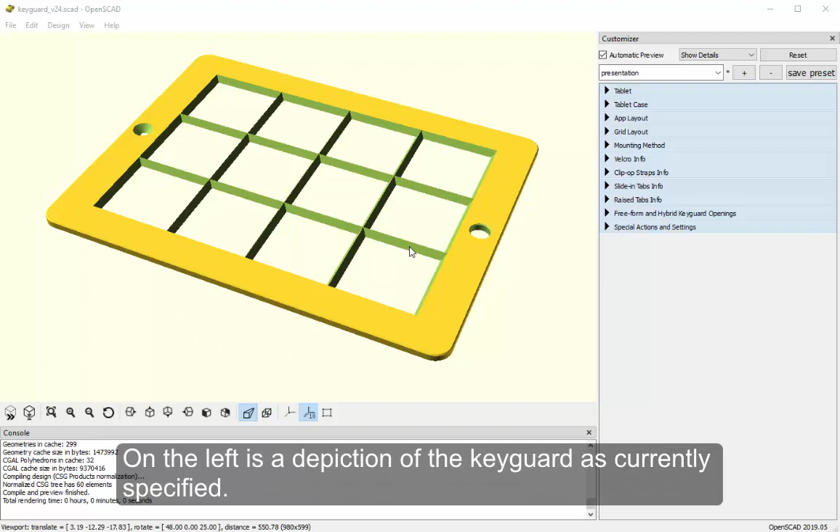When I launch the two, I see a screen like this. On the left is a depiction of the keyguard as currently specified. On the right are a set of expandable sections with options for customizing the design. I'm going to design a keyguard similar to the one that I purchased from Keyguard AT.

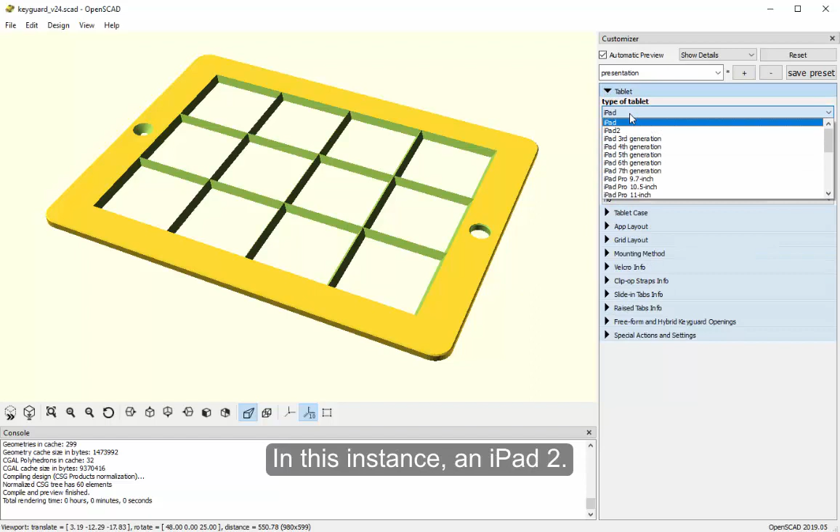First, I'm going to specify the tablet, in this instance an iPad 2. I can choose to expose or hide the camera and home button, but I'm going to leave them exposed. I can also swap the location of the two, and that might be necessary depending on the tablet's case. A detailed explanation of all the options and their implications for the design can be found at the Volksswitch website.

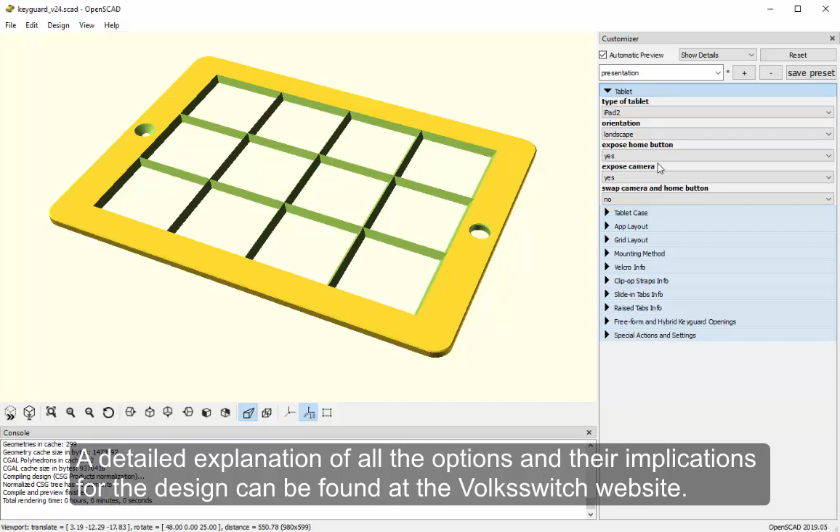Next, I'll specify the layout of the TouchChat app. I'll specify the heights of various components of the app. I can take the measurements using a metric ruler or by counting pixels in a screenshot. According to my measurements, the status bar and the upper message bar are a combined 11 millimeters in height.

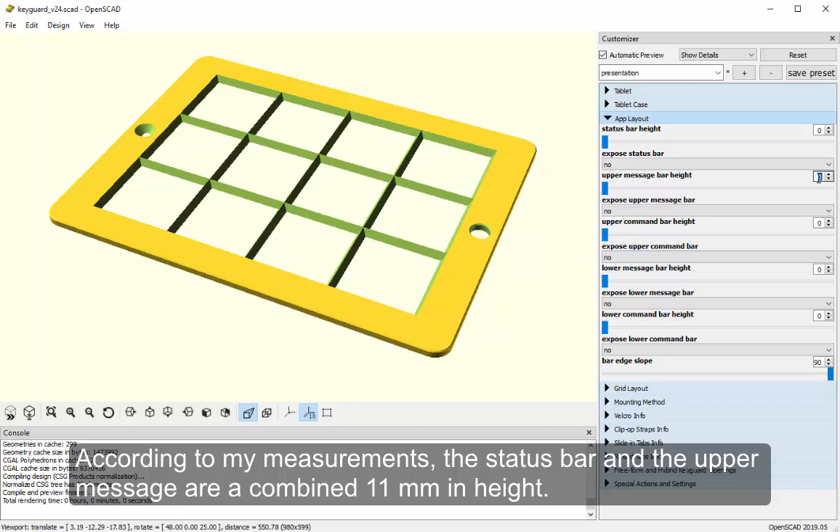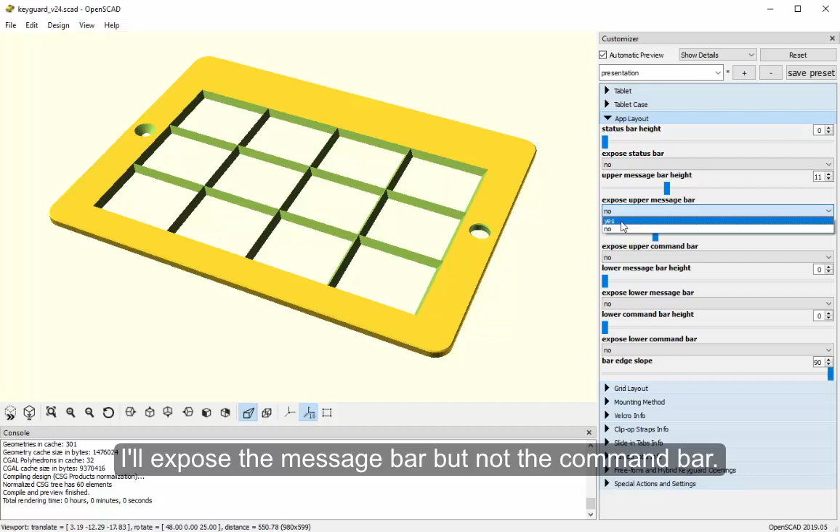Note that the picture on the left updates with each change so I can immediately see if I've made a mistake. The upper command bar is 9 millimeters in height. I'll expose the message bar, but not the command bar. There is no lower message bar or command bar in the TouchChat app, so I'll leave these unchanged.

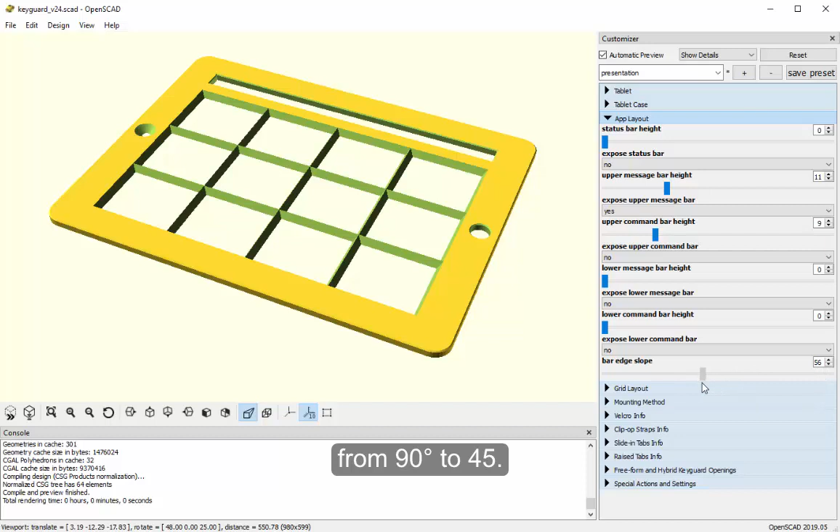I can provide easier manual and visual access to the message bar by changing the bar slope from 90 degrees to 45. This is only possible because we will be 3D printing the keyguard. This is not possible for a laser cut acrylic keyguard where every cut is at 90 degrees.

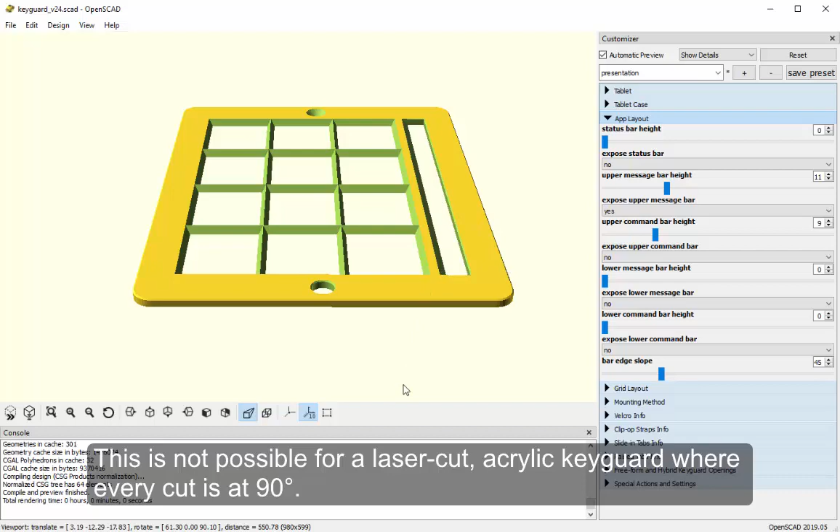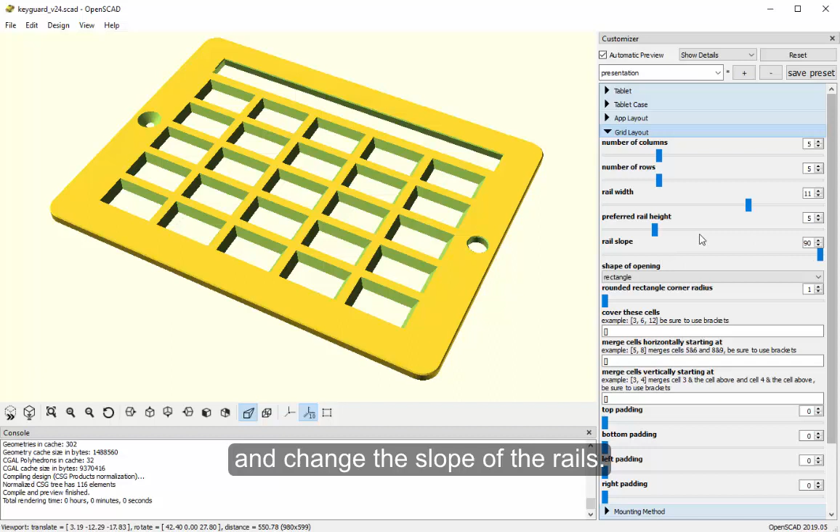Now we'll lay out the grid area. The app will have 5 columns and 5 rows. I could widen the rails between the buttons and change the slope of the rails. Again, laser cut keyguards can only have 90-degree cuts.

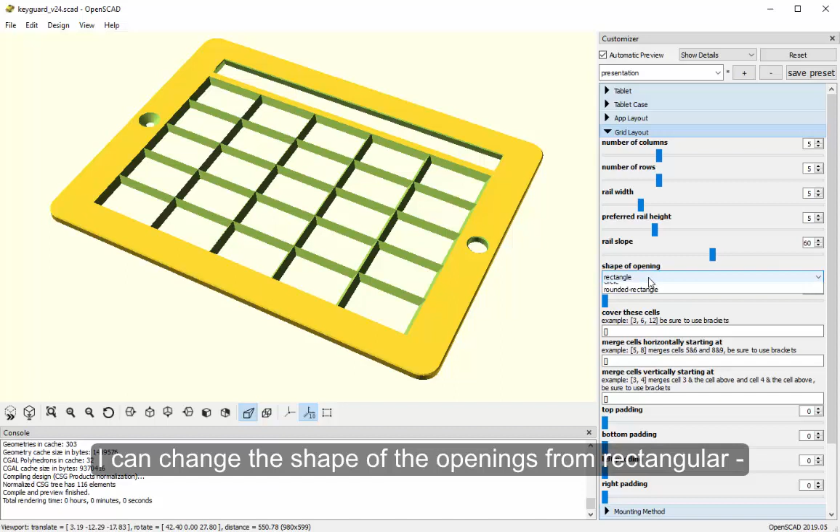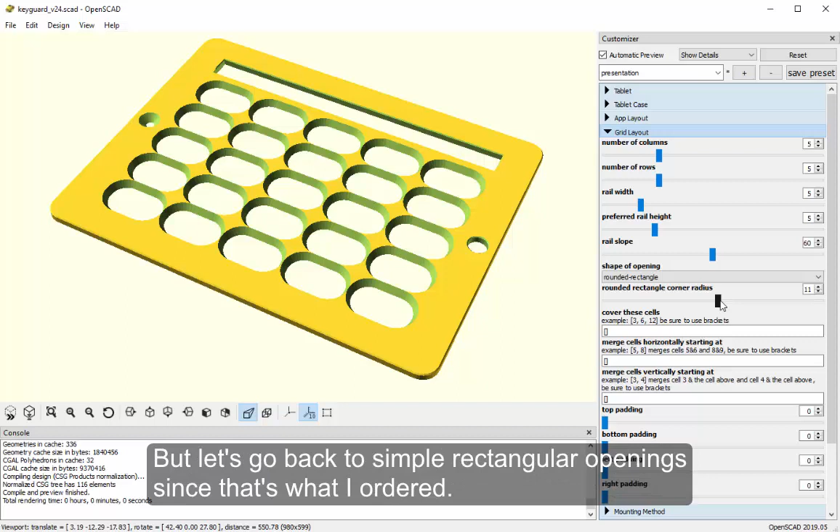I have the option to cover certain cells in the grid or merge them both horizontally and vertically. I can make fine adjustments to the location of the rails by adding padding, but that's not necessary with the TouchChat app.

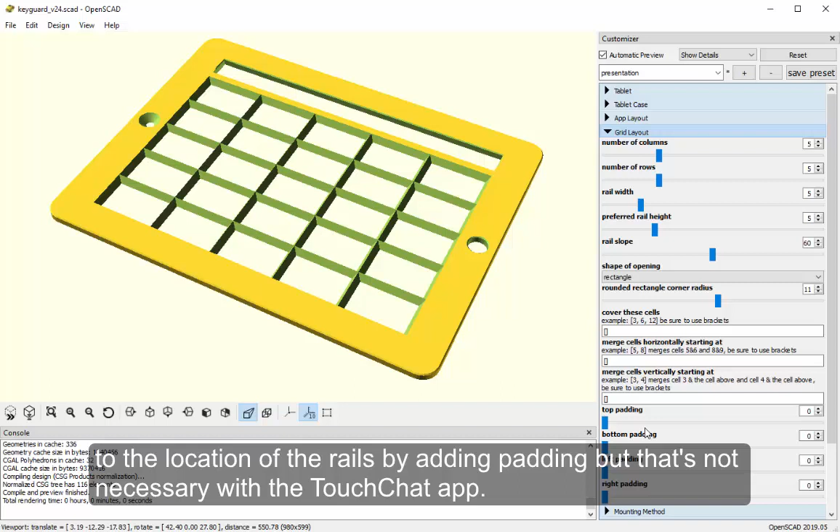We're almost done. The last thing we need to do is settle on the mounting method for the keyguard. If I'm not using a case, I have the option to use suction cups, in which case cuts are made to accommodate the top of each suction cup.

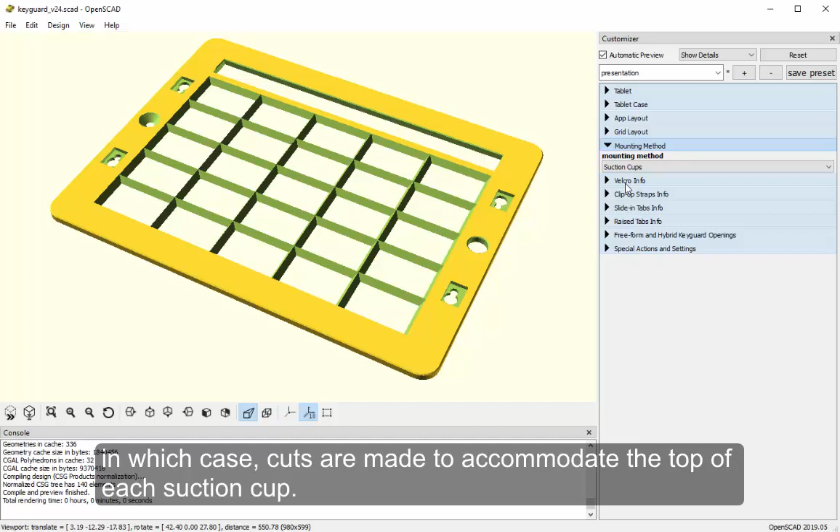I can go with Velcro, in which case recesses are added to the underside of the keyguard. I can go with screw-on straps that I purchased from Keyguard AT, in which case cuts are made to accommodate those straps.

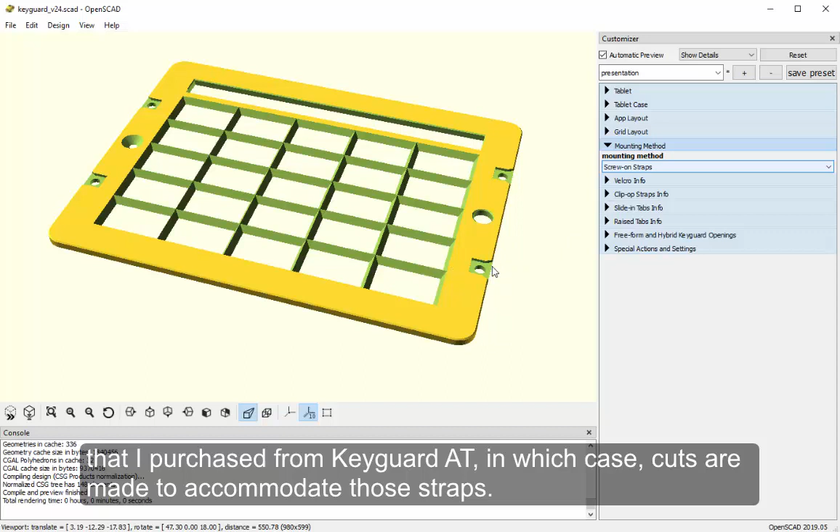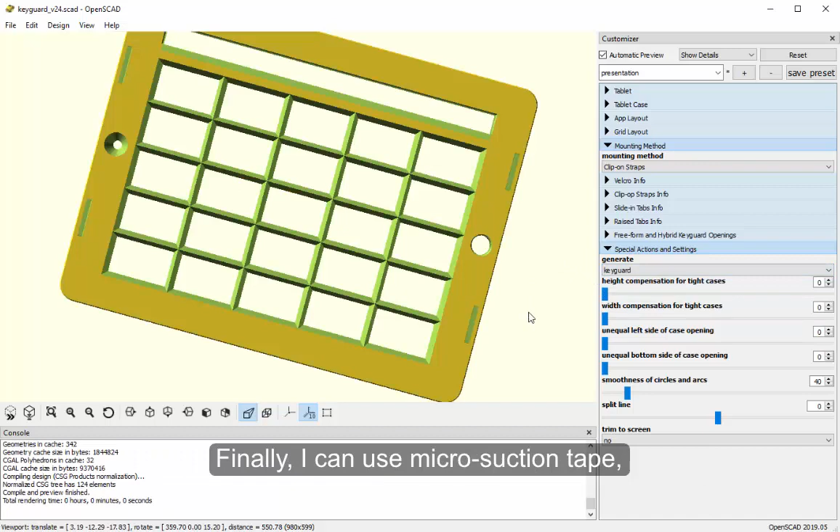I can go with clip-on straps and 3D print the clips. Finally, I can use microsuction tape, in which case I don't need any special mounting features.

But it's rare that a tablet doesn't go into a case. The keyguard I purchased from Keyguard AT was going into an AVAWO Kids case. So let's go to the tablet case section and tell the program that we have a case.

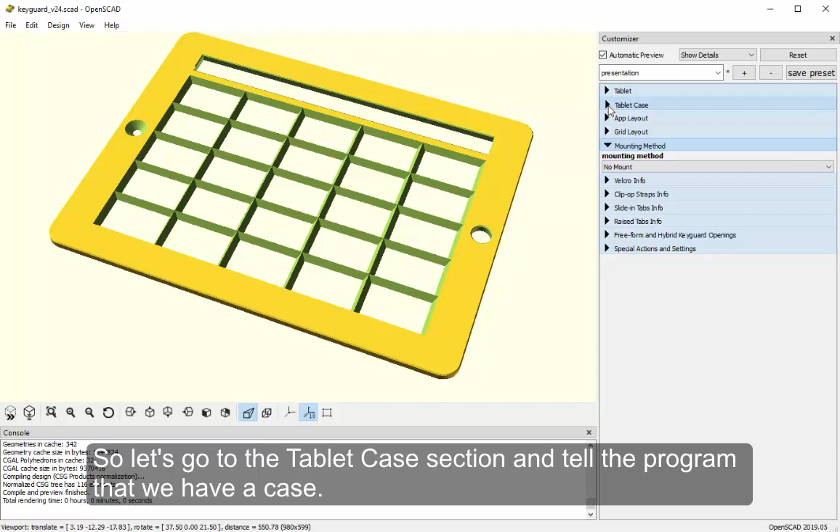We now have to tell the program the size of the opening in the case, since that's what determines the overall size of the keyguard. The opening of my case is 163 millimeters high and 215 millimeters wide. It also has rounded corners with a 5 millimeter radius.

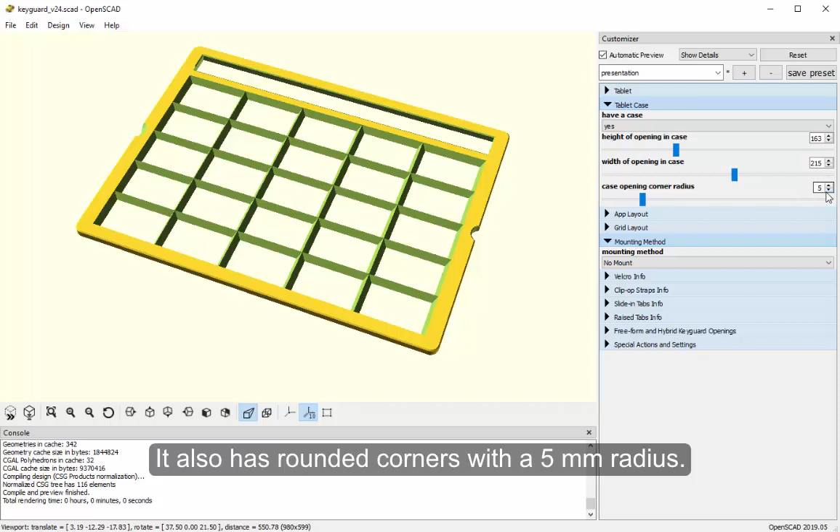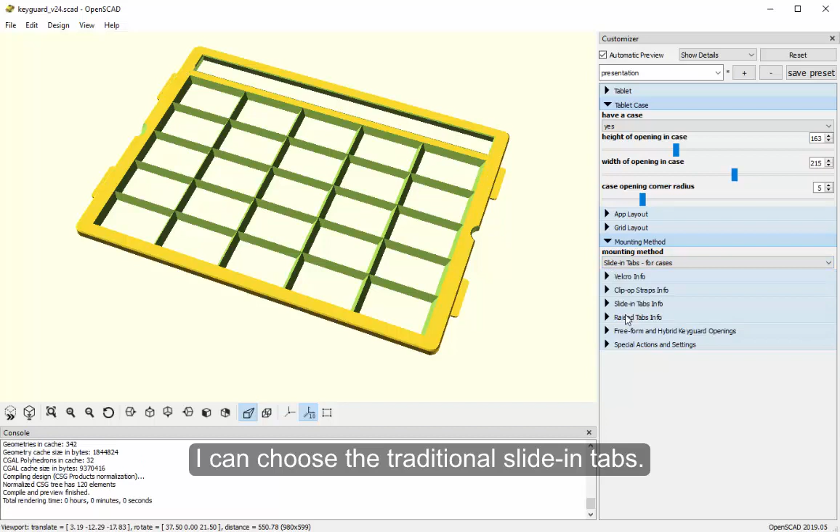Now we'll look at the options for mounting this keyguard in a case. I can still go with clip-on straps and print my own clips. I can choose the traditional slide-in tabs. And finally, I can go with raised tabs.

This may be my best choice for a hard-sided case with a screen protector. But my case is soft-sided, so I'm just going to wedge the keyguard into place, so I'll choose No Mount.

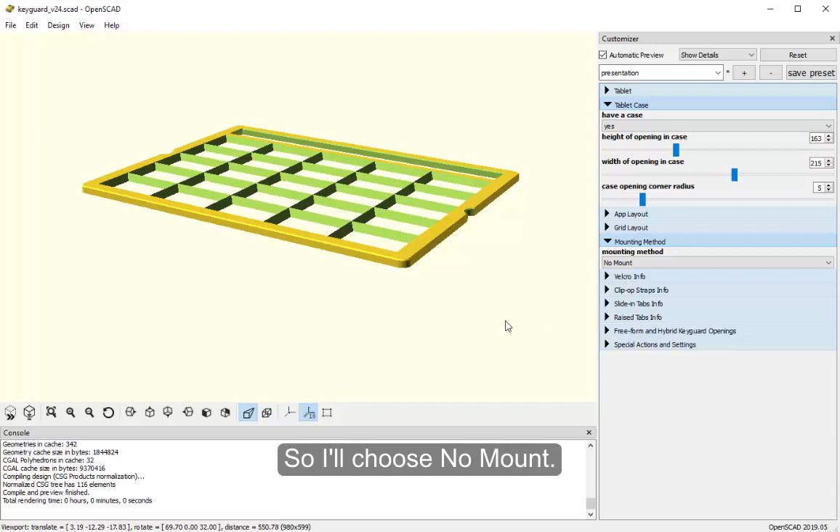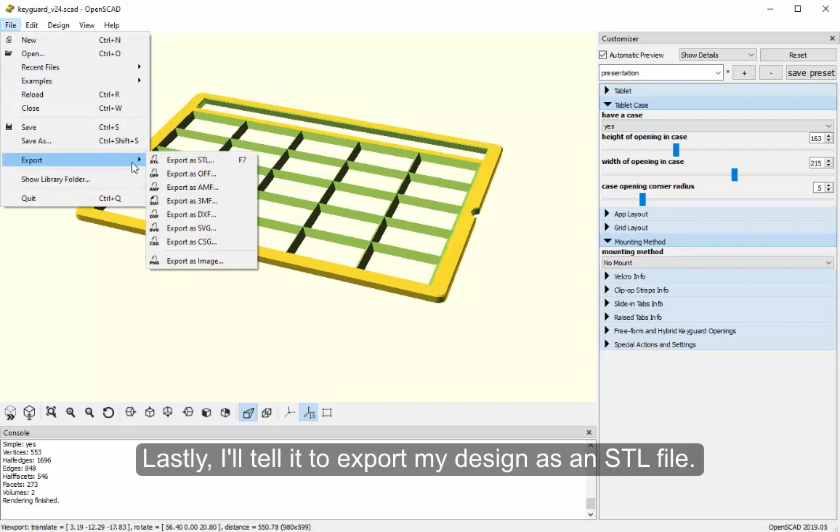My design is ready to go, so I'll tell OpenSCAD to render my design. Lastly, I'll tell it to export my design as an STL file. The next step is to print it.